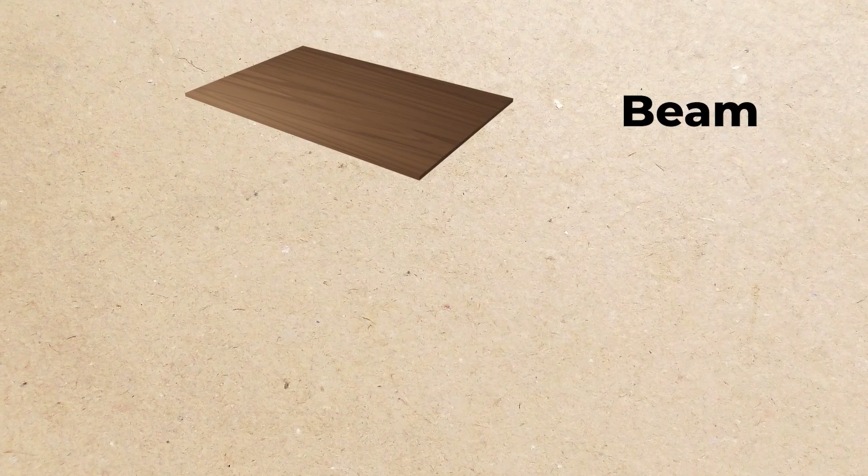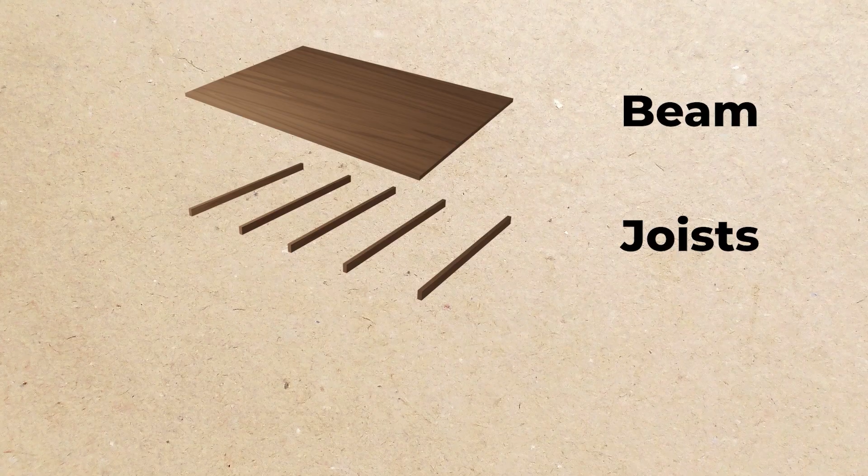So when we think about a 2x4 framed platform, our standard old school scenic floor construction technique, there are really three structural components. There's the lid or cover, which we'll consider as a beam structurally. There are the 2x4 toggles that run across the grain, 4 feet long, which we're going to call joists later on. And then there are the 8-foot long members that run the length of the grain of the plywood sheet. So those are the three structural components of a 2x4 framed platform.

When we look at those components, how do the forces of somebody standing on the platform get from the person down to the ground? How does the 2x4 framed platform transfer those forces around? It seems obvious that when we look down at that platform, the first thing carrying the load is the plywood cover, the topmost structural member. As before, we'll think about a person being on it, but expand that to a uniformly distributed load across the whole thing. That's how these structures are rated in terms of loading capacity over their whole area, so the plywood is carrying that full load across its whole area.

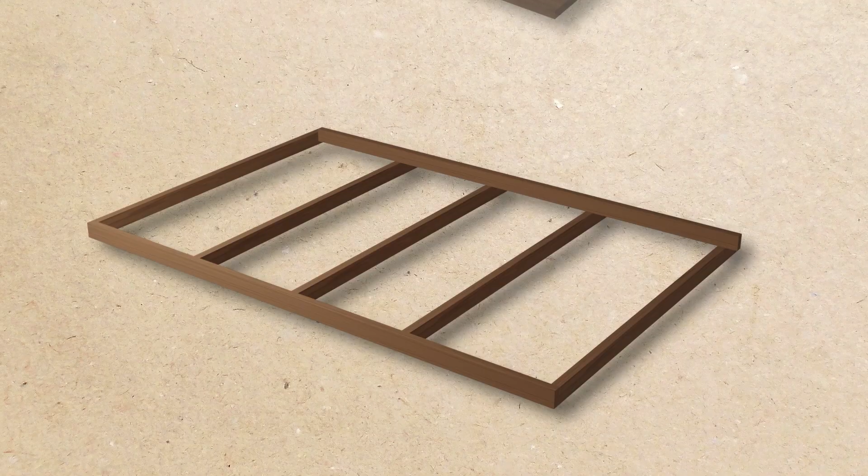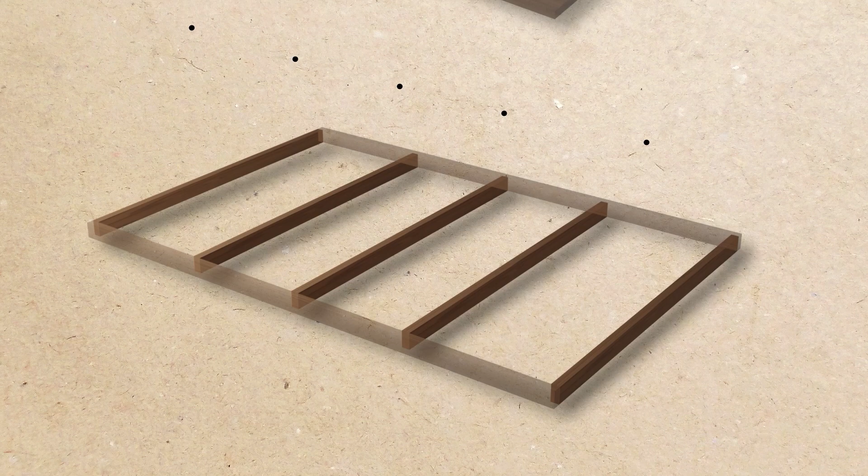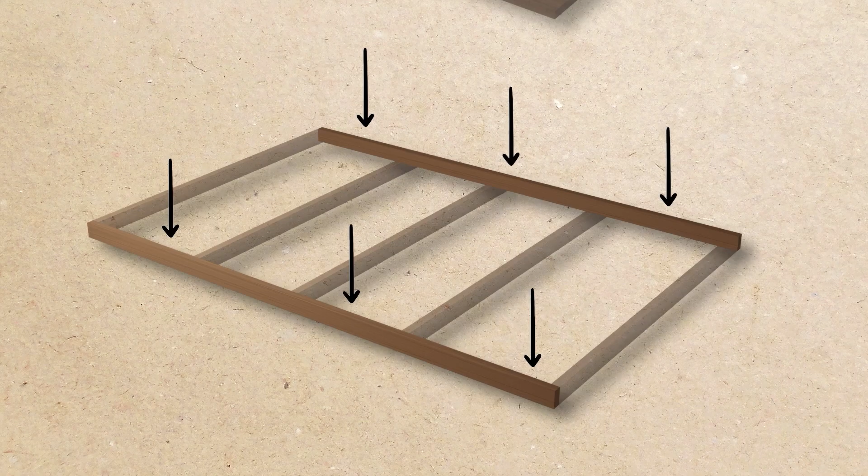What then is carrying the plywood? Pre-engineered construction techniques tell us it's the 4-foot toggles that act as joists carrying the plywood. They run perpendicular to the grain and actually carry the plywood itself. From a structural engineering standpoint, the long members don't carry the plywood at all. So if the plywood carries a load and the joists or toggles carry the plywood, what carries the joists? That would be the 8-foot members, which we're going to call girders. Those long 8-foot members actually carry the 2x4 4-foot members, which carry the plywood lid, which carries the load.

Eventually we'll talk about how all of that gets transferred to some kind of support, a leg, or some other structural element that carries the girders. So that's great - I say that the plywood is carried by the toggles. Who says? How do I come up with that?

The first place we're going to look here in the United States is APA, the Engineered Wood Association - American Plywood Association, though they prefer the longer title. This trade group defines grades of plywood, construction methods for plywood, and other specifications of engineered materials, like glulams and engineered joists, but plywood is their biggest thing. This trade group provides construction guidance for the use of plywood panels in a document called the Panel Design Specification.

You can download that for free from the APA website - there's a link on the Brightspace page. Search the publications page for the Panel Design Specification, document ID D-510. You'll find this very long document that explains how we're supposed to use plywood based on how it's been constructed, and that's where we find these pre-engineered construction guidance techniques. The Panel Design Specification tells us a lot about plywood, and for our purposes it breaks plywood into two groups. First are rated panels, which you'll see stamped as Sturd-I-Floor or rated sheathing.

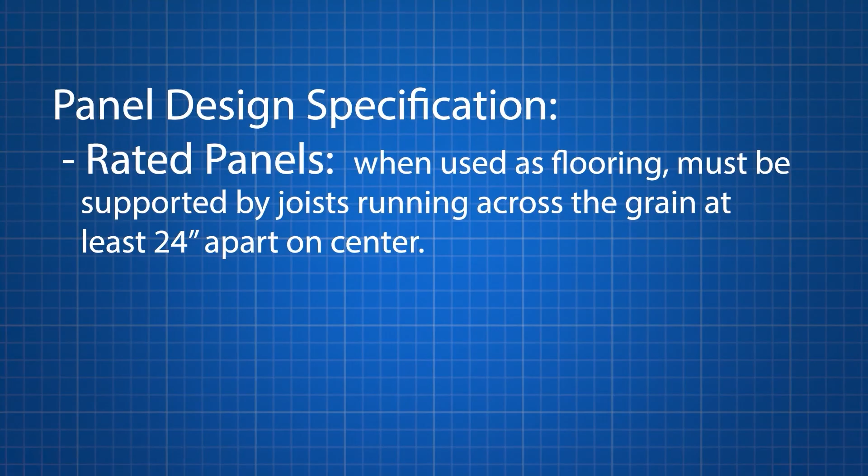The other group of plywood panels we might talk about are visually graded veneer panels. This is what I grew up with, what I'm most familiar with, the so-called AB or CD style of plywood. Those letters refer to the niceness of the face grains.

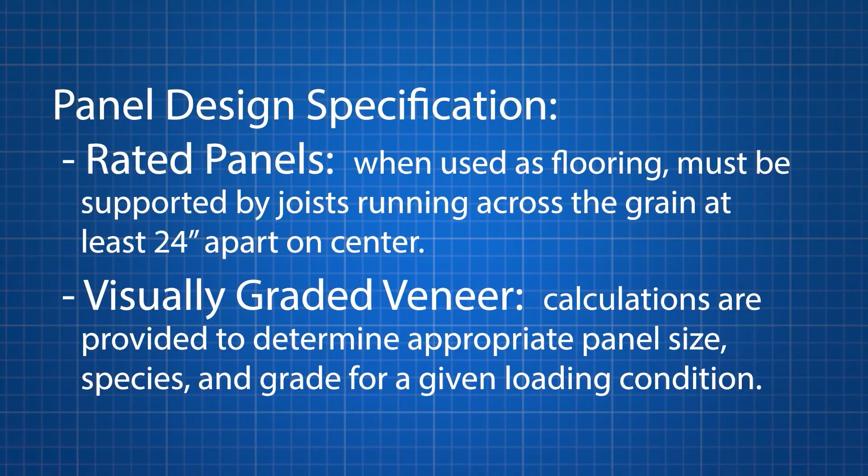For those kinds of plywood sheets, we don't get information about how far apart supports must be, but they provide calculations so we could determine the appropriate size of panel, the appropriate thickness, and the right species and grade for a given loading condition. Those can be tedious to work through if you're not familiar with them, and that's not the purpose of today, so we're not going to talk about that in detail.

However, we can look at a CD sheet of plywood, assuming the weakest species group it could be constructed with. At a 3/4 inch thickness, it will support a load of at least 95 pounds per square foot, provided the supports are running across the grain at least 24 inches apart on center.

So whether we're using Sturd-I-Floor, rated sheathing, or the ugliest, weakest CD weak-species plywood we could find, if those panels are 3/4 of an inch thick, we always want joists running perpendicular to the grain, at most 24 inches apart on center. In both cases we know we'll support at least 50 pounds per square foot, closer to 100 pounds per square foot.

That's fantastic, because we can now dispense with thinking any more about plywood. Any kind of plywood sheet we get that's better than the weakest we can find at 3/4 of an inch thick is going to be more than enough to satisfy our loading condition of 50 pounds per square foot.

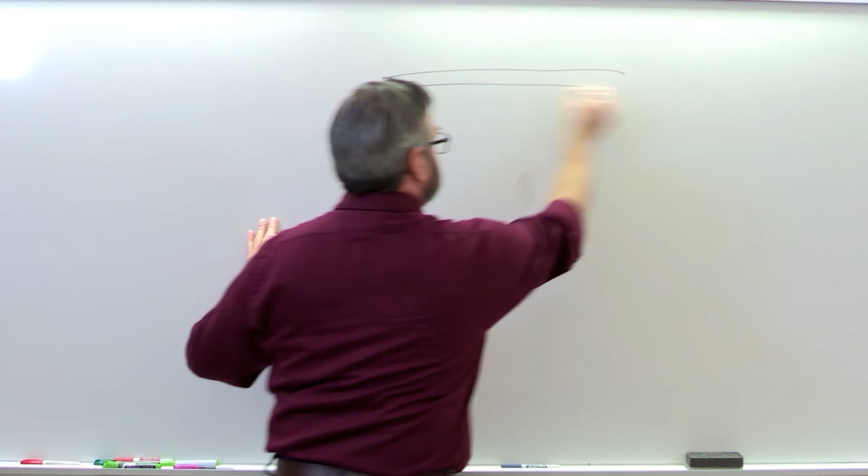Better with a picture, let's draw a picture. We imagine a top view of the frame of a 2x4 framed platform. This is obviously not to scale. 8-foot members and 4-foot joists, right?

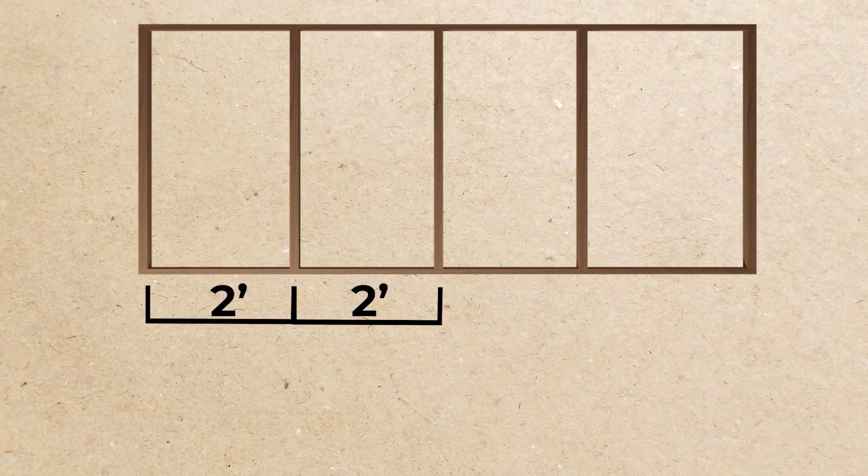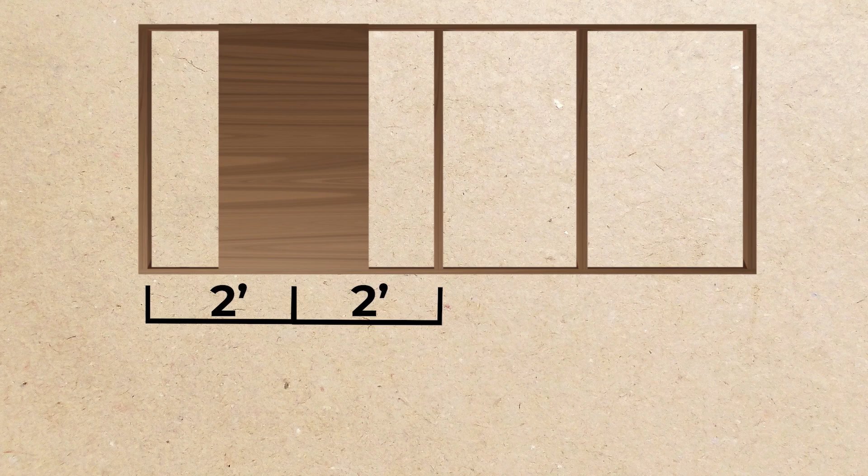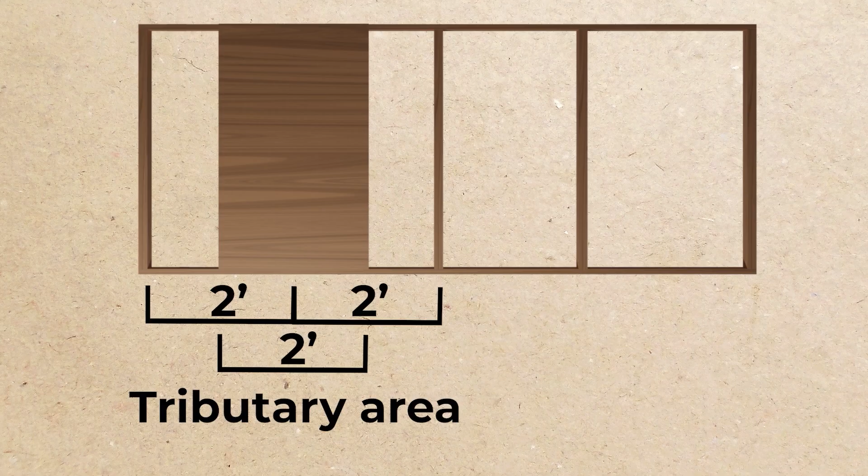We know these are spaced 2 feet apart, and these are spaced 2 feet apart. This joist here is going to carry this much of the plywood load, from halfway between these two to halfway between these two. That distance is going to be 2 feet. So on a 2x4 framed platform, each of these interior joists is going to carry an area of 2 feet by 4 feet. Now these external joists on either end are going to carry half of that, right?

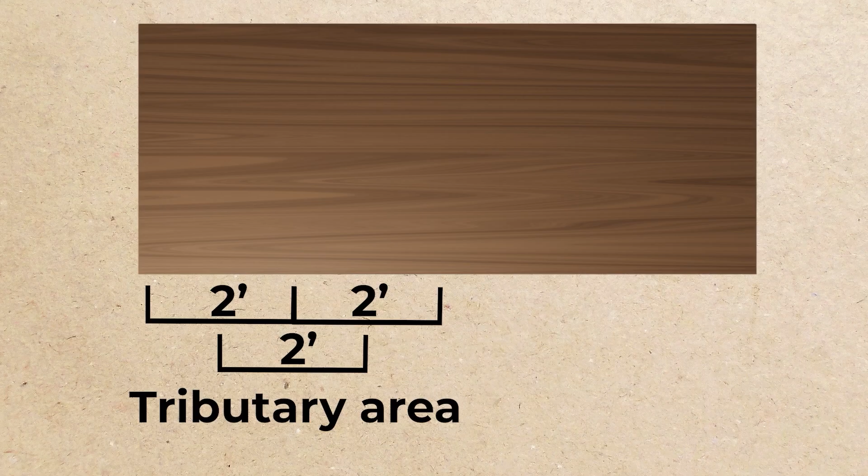1 foot by 4 feet, or 4 square feet. Does that make sense? Hope so. So in this 2x4 frame platform, these joists in the interior are going to carry the largest load. So let's just think about those.

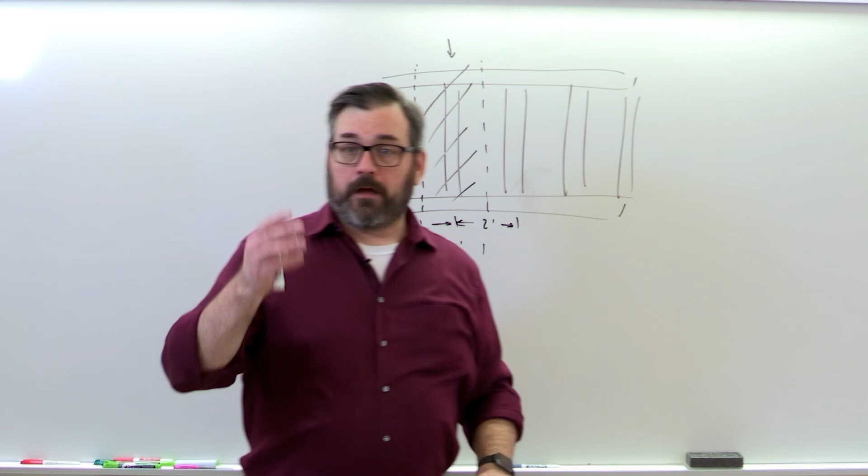If we build to that capacity, then we're going to be fine here if we use the same material, right? So this is going to carry a tributary area of 2 feet by 4 feet, or 8 square feet. And if the uniform load is 50 pounds per square foot, we can just multiply 50 times 8 to get the total weight this joist is going to carry. 8 times 50 is 400 pounds. That's the load this joist is going to carry, and this joist is going to carry half of that, or 200 pounds.

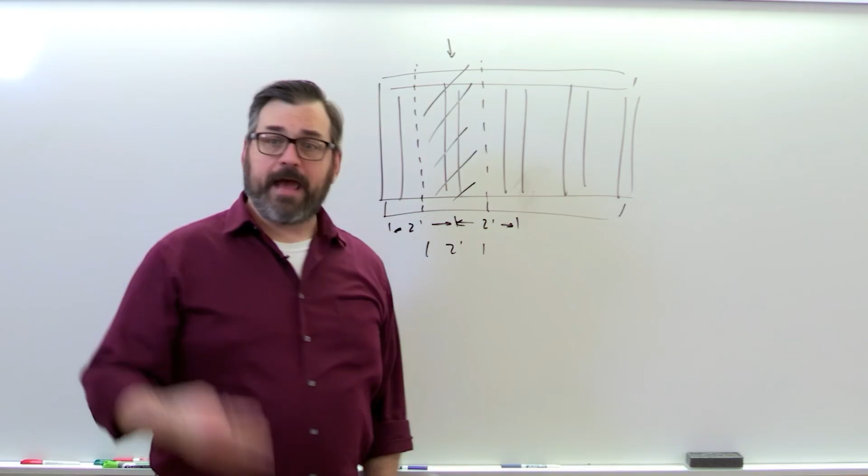Before, when we were talking about the plywood, we referred to the panel design specification generated by the Engineered Wood Association, the APA. For sawn lumber, like 2x4, we refer to a document called the National Design Specification for Wood Construction, generated by the American Forest and Paper Association, the American Wood Council. I love these long names.

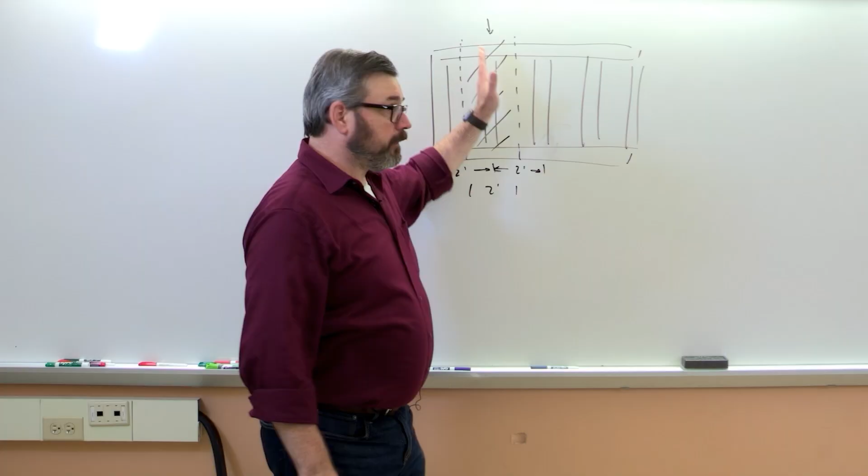A rule of thumb for number 2 grade 2x4 lumber of basically any species: at these kinds of loads, around 400 pounds total, about 100 pounds per linear foot, we need, for every 1 foot of span, 1 inch of nominal depth. So for a load of approximately 100 pounds per linear foot along this length, that is 400 pounds, right? For a number 2, any species of 2x4 lumber, we need, for every 1 foot of span, 1 inch of depth. Well, the span of that joist is 4 feet, and that means we need about 4 inches of depth, or a 2x4. Pretty simple.

That's the rule of thumb. That's how we know it works from the American Forest and Paper Association. Just like the panel design specification, the NDS, the National Design Specification, provides calculations for determining whether a specific species, grade, and size of sawn lumber will satisfy specific loading requirements. We don't want to do those calculations for this course, but know that they exist, and that's where these rules of thumb come from.

I did a quick look at a 4-foot span using a number 2 hemlock fir 2x4, which is one of the weakest species for a bending member like this. On edge, it just barely supports a 400-pound load—like 401 pounds or something, distributed along its whole length. So by both of these approaches, we can confirm that plywood resting on joists 4 feet long, supported on either end, of number 2, any species 2x4, has sufficient capacity to carry the load.

That's why a 2x4 framed platform works, why it exists the way it does, because 2x4 is the smallest lumber size we can get away with using to support a 50-pound per square foot load, which is what we'd want to see on stage. Let me just say that one more time, because I think I said it kind of fast. We can assume a number 2 grade 2x4 of most any species, used as a joist in this kind of situation, will suffice to support a 50 pound per square foot load, provided the structural members run across the grain, are supported, are no more than 2 feet apart, and are secured to whatever is carrying them, which is the next question.

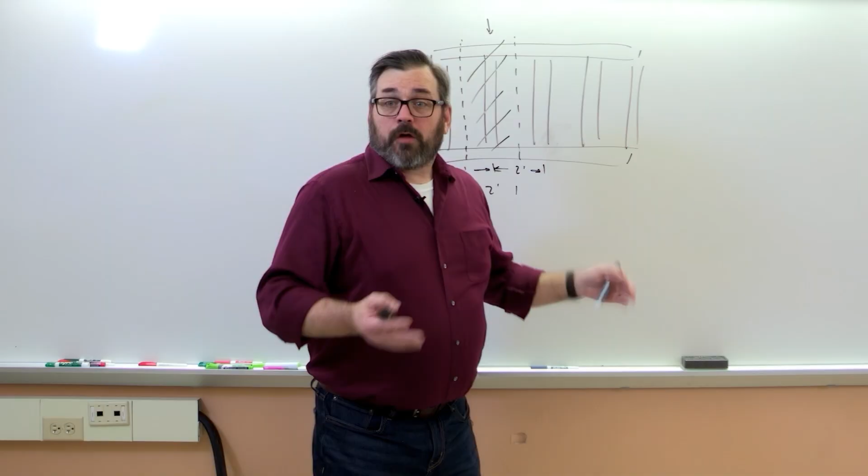What is carrying them? Well, if the plywood is carried by these joists, then these joists are going to be carried by these 8-foot members. We're going to call those girders. Girders carry joists, right? So if the plywood is carried by these joists, and the joists are in turn carried by these girders on either side, our rule of thumb from earlier still holds at these kinds of loads, and if we did some math, we'd see this is approximately equivalent to 100 pounds per linear foot.

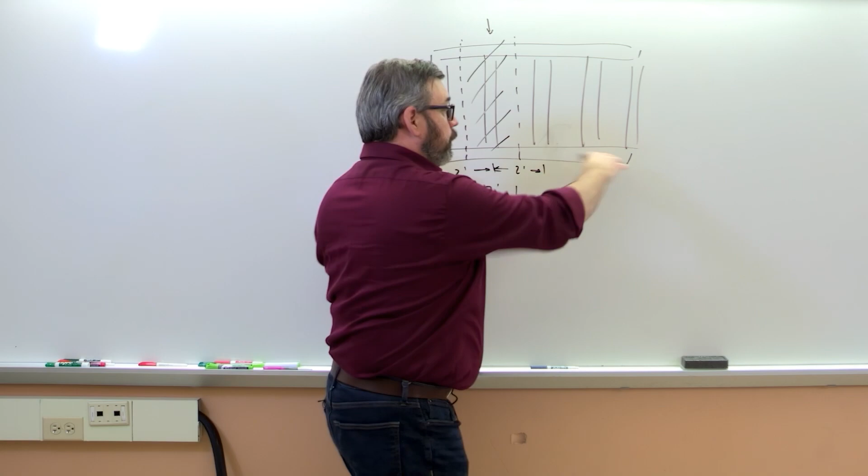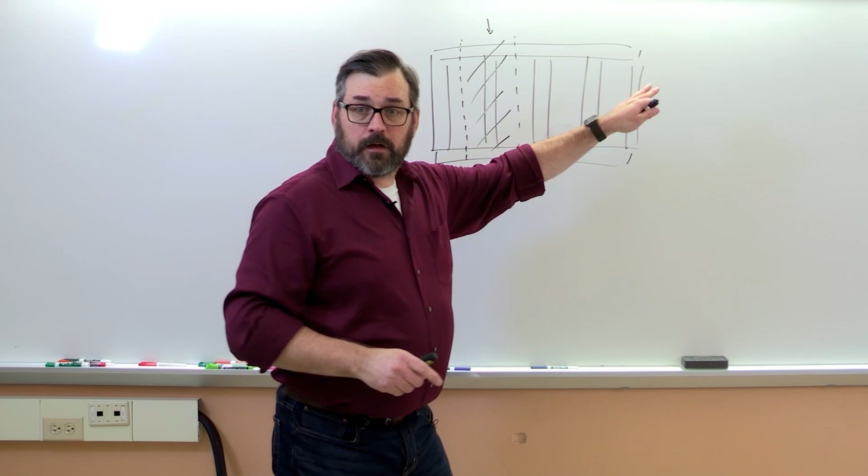We need, for every 1 foot of span, 1 inch of depth. The span of a girder on a 4x8 platform is 8 feet. So for this span, we'd need a 2x8. That doesn't make any sense. What's going on here? We have to ask, what carries the girder? If we assume there are legs in all 4 corners, then there's one leg on each corner, each edge, supporting that 8-foot girder.

That's an 8-foot span. We know from our rule of thumb that 2x4s carrying these loads can't span more than 4 feet. That means for a 2x4 framed platform, we need at least one more leg in the middle of each long member on each side. Each girder must be carried by 3 supports if we use a number 2 grade of any species 2x4 as the long framing member: one at each end and one at the center.

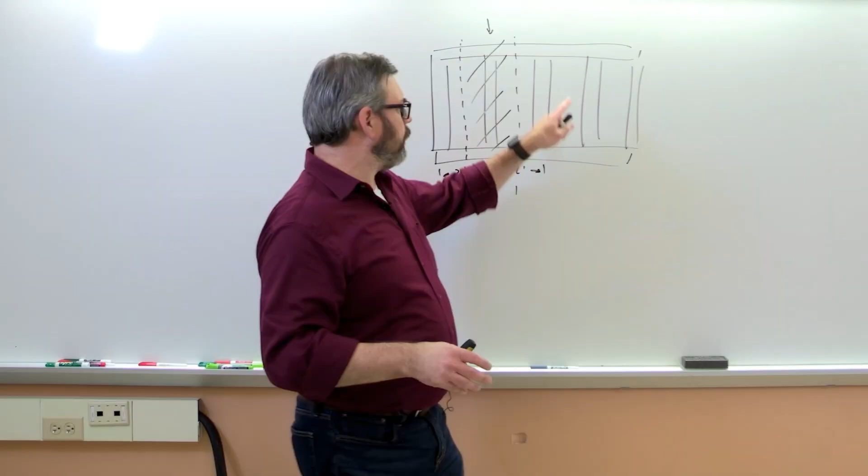We should talk a little bit before we wrap this up about fasteners. We haven't really talked about that. We mentioned we could use any kind of screw, we don't need glue for the lid, but we haven't talked about where the joists meet the girders. If the girder carries those joists, how they're secured to each other matters, because we have to figure out how to transfer those forces across. What does that joint look like?

A typical scenic practice, for well or ill, and this will undoubtedly get lots of comments, is to use sheetrock and drywall screws, driving those sheetrock screws through the 8-foot member into the end grain of the 4-foot members. So we've got our girder here and our joist here, and we're going to drive a screw through the girder into the joist. It's common practice. We've all done it. I've done it probably a million times.

There's some problems with this structurally. First, this puts a pretty significant shear load on the sheetrock screws. Remember we talked about shear. If the joists are carried by the girder, the joists want to sink and the girder doesn't, which means those drywall screws are now in shear, which is bad—they're not strong that way. This is reduced somewhat because the plywood lid rests across that joint and carries some of the load, but that means we're putting the plywood in shear along that 8-foot member, and we haven't really analyzed the plywood for its ability to resist that.

So that's worth knowing. Okay practice, because we know empirically that it usually works out just fine, is to use sheetrock screws for short-term installations of these 2x4 framed platforms, provided we inspect them regularly for things starting to pull apart or break, or screws starting to break. Good practice, better practice, would be to use wood screws. Wood screws are designed to resist shear far better than drywall screws, increasing the ability of that joint to hold against the shear load that's happening.

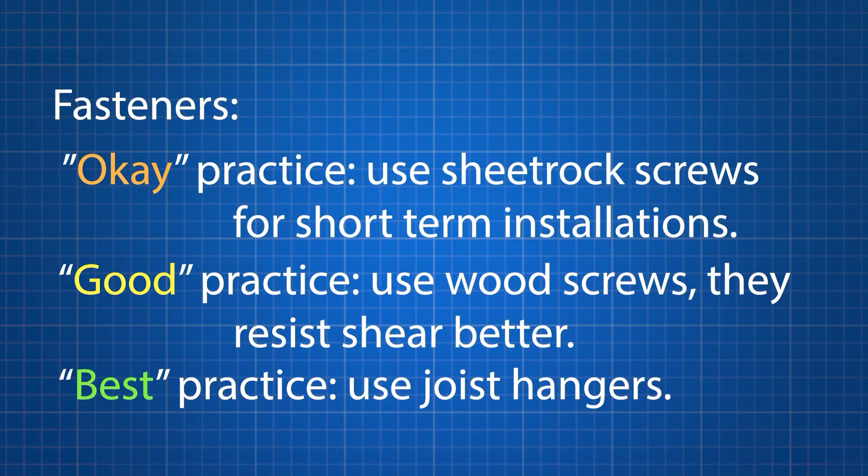Best practice, no one ever does this, but probably we should, is to use joist hangers. That is the reason joist hangers exist in housing construction—they provide a method for hanging the joist off the girder so that we don't have any shear loads, just more tensile or compressive loads, if that makes sense, which the joist hanger is designed to resist well. That would be best practice. I'm betting no one's going to go away from this starting to use joist hangers in their 2x4 framed platforms.

And that's okay because we're going to use them for shorter lengths of time. They're not in use 100% of the time, all the time, and we have opportunities to inspect them in between uses. Okay, we covered a lot of material.

So just to sum up, loads on a 2x4 frame platform: there are 3 basic structural components—the plywood lid, the 2x4 joists that run across the grain, and the 2x4 girders that run along the grain. The plywood is rated at 3/4 inch plywood of just about any species, CD grade, which is the lowest, weakest grade. Any of those would be rated for at least 95 pounds per square foot load, provided those toggles are 24 inches on center, which is why we build it that way.

The toggles, 2x4 toggles, number 2 grade, even the weakest species, when they span 4 feet, can hold a load of about 100 pounds per linear foot, which is what we would see in a 2x4 frame platform at its greatest capacity we would want, as long as they're supported at either end of 4 feet—more than sufficient. That's why a 2x4 framed platform is built the way it is. Those joists are carried then by the 8-foot members. The same rules of thumb apply. If we only want to use a 2x4, we can't span that full 8 feet. We need supports at a minimum of 4 feet, a maximum of 4 feet away—so the corners and one in the center.